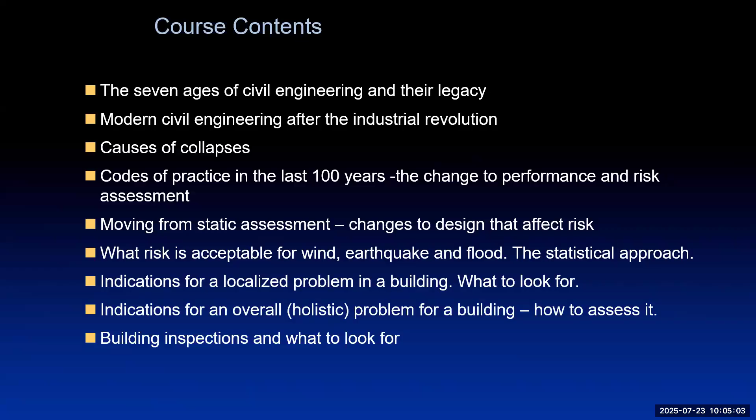And particularly, we'll look at the statistical approach, indications for a localized problem in a building and what to look for, and then indications for an overall, holistic assessment of an entire building and how to perform that. And then generally about building inspections, what we should look for.

So first of all, let's start with these 7 ages of civil engineering and their legacy. And these are the basic ones. I'm going to go into a little bit of detail here.

Essentially, we start off with early civilizations between 10,000 and 500 BCE. And that essentially occurred looking at palaces, burial tombs, ziggurats, pyramids, great walls of China, to keep out enemies of particular civilizations.

Then we have classical antiquity, between 500 BCE and 500 CE. That's basically the Greek and Roman civilizations. They introduced codification of sorts, and were particularly interested in producing roads to transport people, food, and various other things around. But particularly, they were interested in the water supply. The Romans developed concrete in their early stages, and the Chinese produced roof tiles during that period.

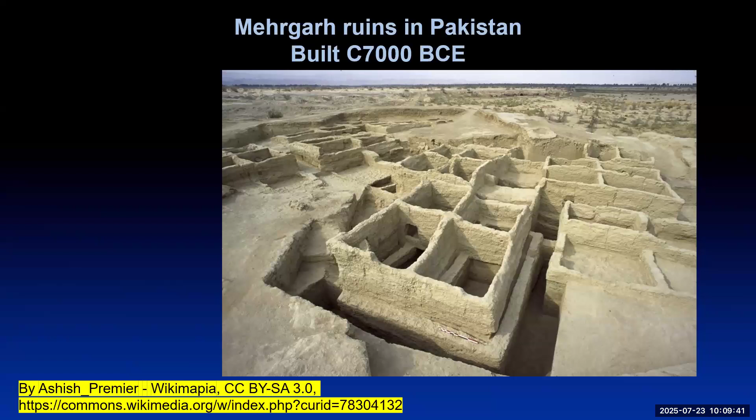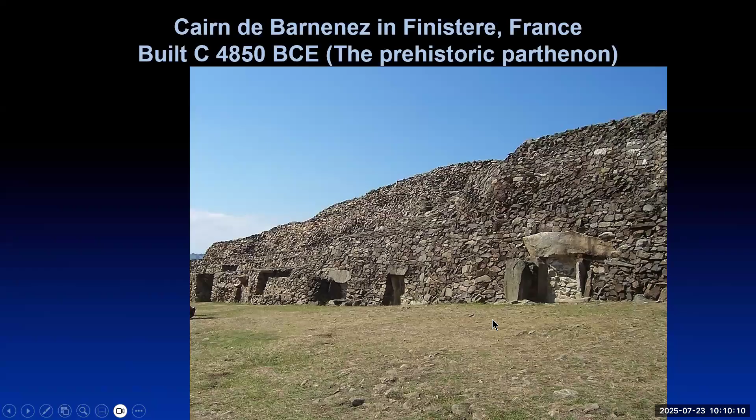Then we have Cairn de Barnenez in Finistère in France, which was about 4850 BCE, known as the prehistoric Parthenon. I'd like you to notice here that the materials used were stones, and these were fitted together. It was a type of building that we went on to use for over 1,000 years.

And then 3250 BCE, there is a temple in Malta. During all of this period, we found that the people who were in charge, the ones who manipulated civilizations, wanted cathedrals, temples, various things, and forts to be able to protect themselves. And this was in Malta.

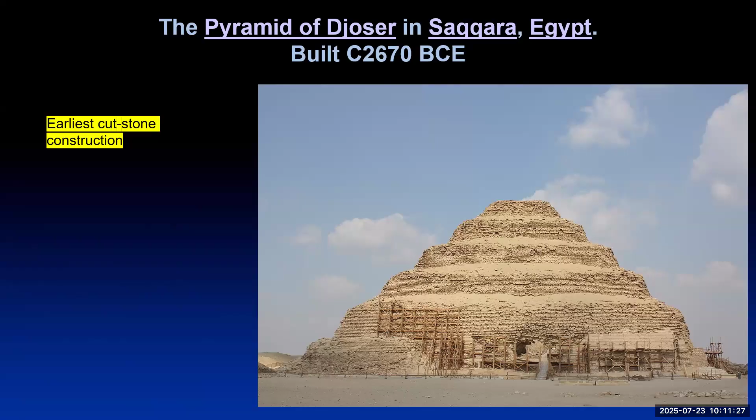And then you're probably aware of what was going on in Egypt. This is 2670 BCE, and it's actually the first of the pyramids that they constructed there. It's the Pyramid of Djoser in Saqqara in Egypt, and of course the Great Pyramid of Giza, which you're probably more aware of, and that was built 2560 BCE.

In Syria, we had remains of the Zimri Lim Palace there. Again, you could only build something extensive if you were a person of great power. And you can see here, this is basically mud, which is held together and cracks quite easily as well.

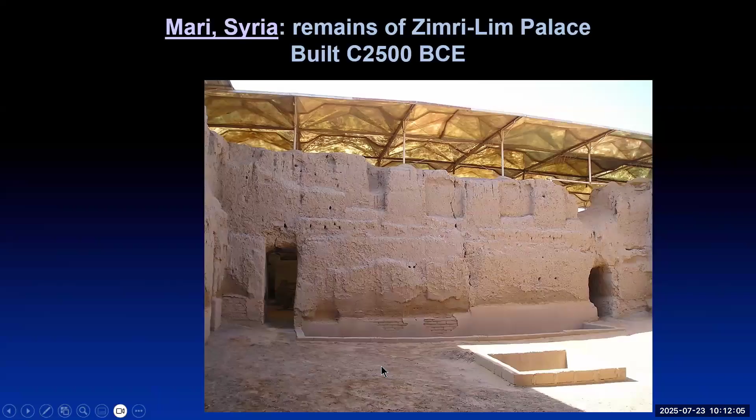And then we move into 700 BCE, in which there are properties which are called necropolises. This is burial chambers for important people.

And then classical antiquity, 500 BC to 500 CE. And there, of course, we have the Parthenon in Greece. Now, this was a much more extensive structure. It looks as though it underwent a lot of problems here, but it didn't. Ammunition was held in there for a long time and exploded, causing the problems, and it has never been put right.

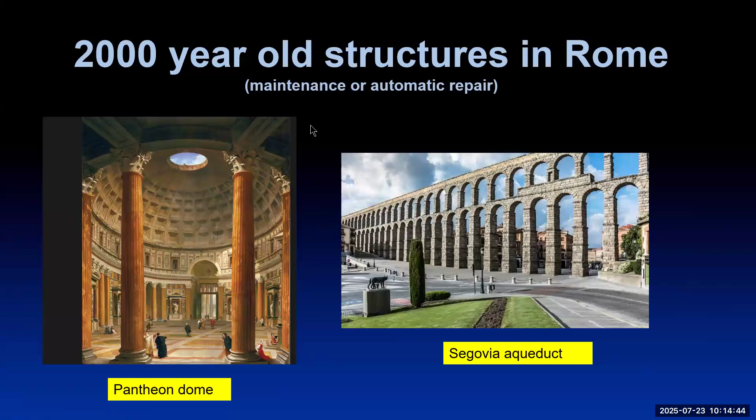There you can see the Pantheon, the dome, and the Segovia aqueduct. Now, they were very, very clever in getting water to come into their industrial areas. And this Segovia aqueduct was used for over 1,000 years afterwards. This is the Pantheon, and you can see the dome in the background there, and that's a view from outside.

And this is the Segovia aqueduct. You can see the use of arches, but very little cement in there. You can see, if you look closely here, that the stones were applied very carefully so that gravity would hold them together. And the use of the arch principle was extensive in Roman times.

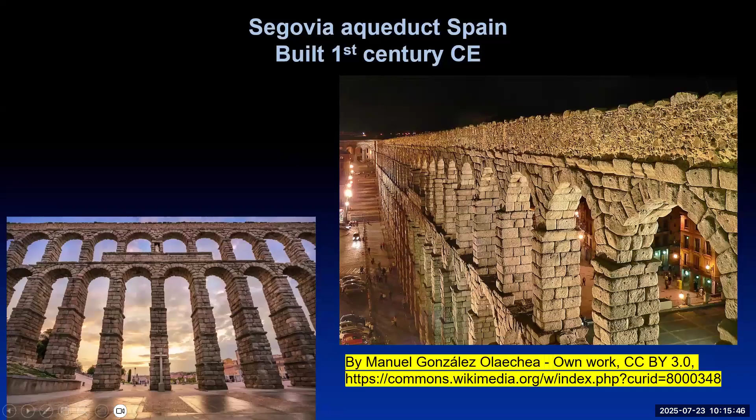They were also very good throughout the Middle East and Southern Europe in looking at the use of water for people bathing, cooling, and various things. Now, at this time, the Qanats underneath the Persian desert were built in 700 BCE. Remember, at that sort of time, there was no electricity, there were no power tools. These were hand carved and were built with such precision that the water would flow usefully, and people could go there to bathe.

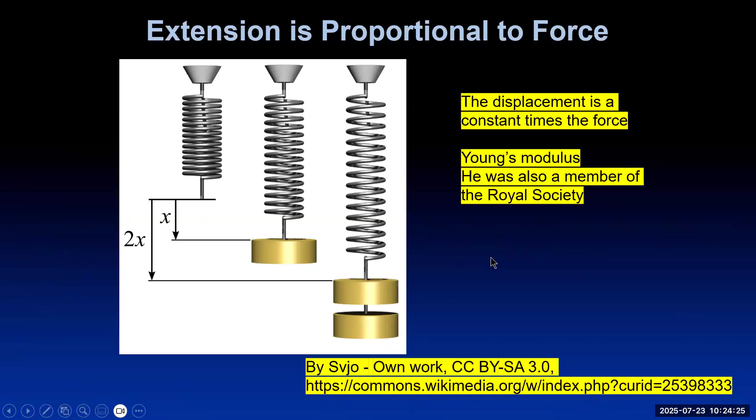In other words, if we have a spring with a weight on it, it extends by a certain amount. If we have 2 times that weight, we have 2 times the extension. Young's modulus will tell us what that can be. Newton's second law of motion, force equals mass times acceleration, we also use to some extent. So let's look for a moment at commonly used equations in civil engineering.

Firstly, the ratio of stress to strain. Sigma is stress and epsilon is strain, so E equals sigma upon epsilon. That is E, the Young's modulus.

For a bar with a constant cross section and deformation, then the deformation is F, the force, times L, the length, upon A, the area, and E, Young's modulus.

Deflection of the beam, simply supported, with a central point load: delta, the deflection, is P, the force, times L cubed, the length of the beam, upon 48 E, the Young's modulus, and I, the moment of inertia.

Critical buckling load, PCR, of a column of length L with moment of inertia I, is PCR equals pi squared EI upon L squared. Again, we have Young's modulus there. So Hooke and Young absolutely revolutionized what we are doing these days.

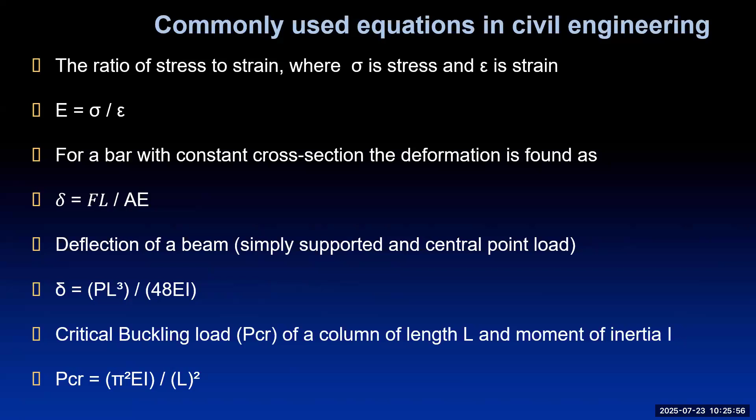If you've been to university or college, you will undoubtedly have undertaken some of these laboratory tests in which a load is applied to a beam and we measure displacement in some way. We use devices for creating larger forces, applying Hooke's law, which says that the displacement is the force divided by the stiffness.

Everyone does this type of testing when they're at school.

Now let's leave that for a moment and come back to it, taking you into the Industrial Revolution from 1760 to 1900. This was also a time of the Enlightenment, where science actually got a dominant position as far as engineering and civil engineering occurred.

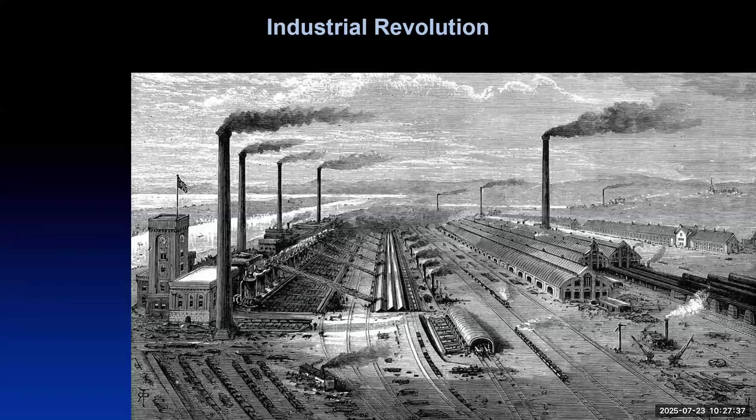The Industrial Revolution was based on the use of coal and other fossil fuels. We weren't so worried about the environment in those days. What we were interested in was creating heat, thereby steam, and being able to manipulate all sorts of things. We were also able to create iron because we had blast furnaces in which we made it.

This is a picture of the Iron Bridge in Shropshire, United Kingdom. It was built from 1777 to 1779, and it was the first use of iron to create part of a bridge, a part of a roadway going via a bridge over a river.

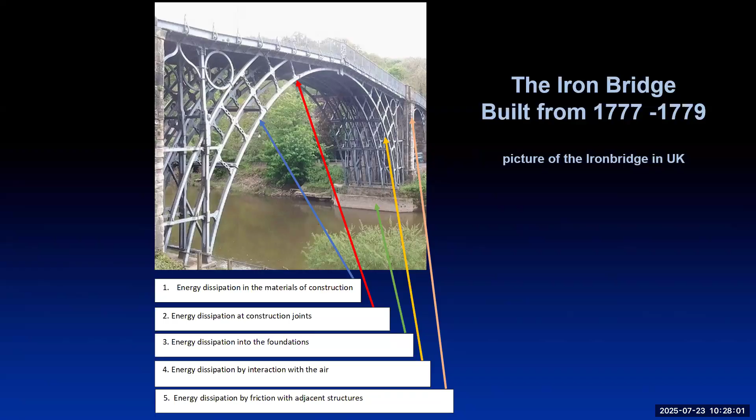If you look in New York City and other places in the United States around that 18th century, you'll see that the use of brickwork was very haphazard, but there was a rudimentary cement type. So if you have a building which is that old, be aware that the cement is going to be less stable.

Then we come to the early modern period, 1900 to 1999, where we looked at the dynamics of structures. We had unusual structures as well, because science was extending and allowed us to do all sorts of things we hadn't been able to do before.

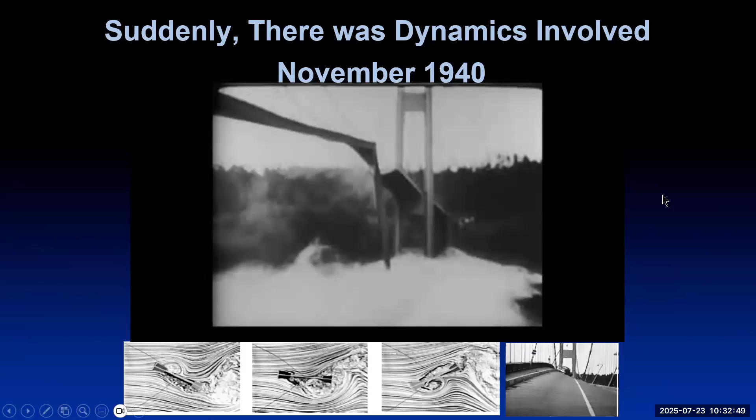Have we learned from it? No, we haven't. This is the RFK Bridge in New York City, where, in this particular case, we are monitoring damping. I'll come back to that later, but damping would normally be at this level and then rise as the amplitude of response increases. But what we've got is two areas here where we have excitation that forces the structure into larger amplitudes of response. In other words, it's vortex excitation in exactly the same way as the problem with the Tacoma Narrows. However, in this case, the wind speed which causes that resonance is so high that it's not a problem for the RFK Bridge.

That's because the RFK Bridge has a fundamental natural frequency of approximately 0.2 hertz, in other words, one cycle every 5 seconds. So the critical wind speed is too high for it to be a problem.

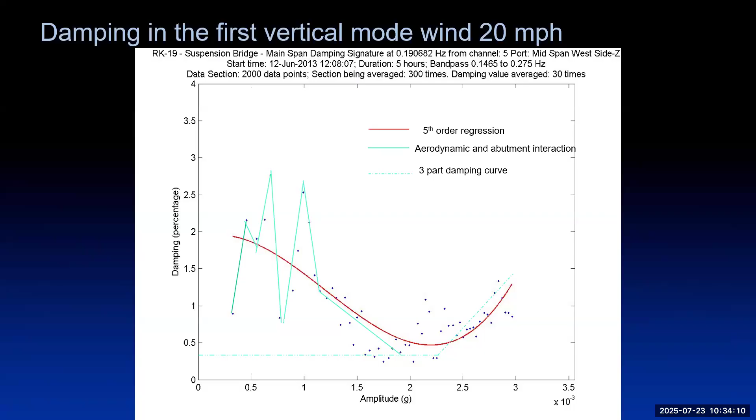I spent some time on site at Ferrybridge, and met somebody who'd actually been involved with the construction there. I made a comment to him saying they should have been 10 inches thick, they shouldn't have blown down. And he said, they weren't 10 inches thick. I built them. They were 8 inches thick as a maximum.

So the stiffness of the cooling tower was not enough to negate the effect of the wind. However, we didn't at that time, in 1965, understand what the dynamics of the response of cooling towers is, and they are very, very complex. We have problems of scour,

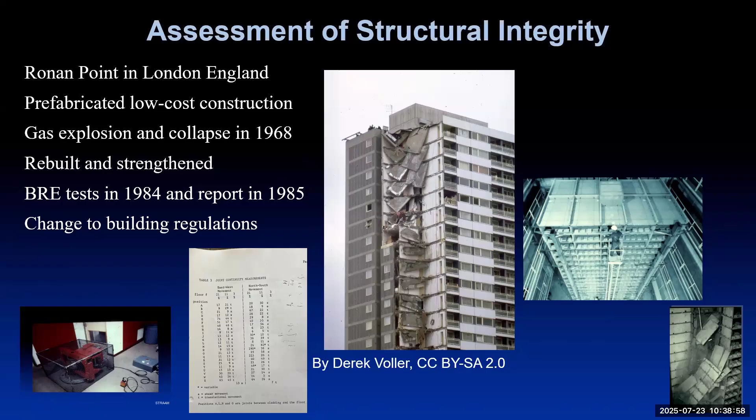There were other things going on, like the Teton Dam failure in the US. But what was happening was we were actually deciding that structural integrity is a must of structures. With Ronan Point, we decided that we had to define how we were going to affect construction. And that's come into codes of practice, including the United States ones as well.

So the codes allow for testing of structures, but currently engineers cannot verify structural integrity as required without measurement.

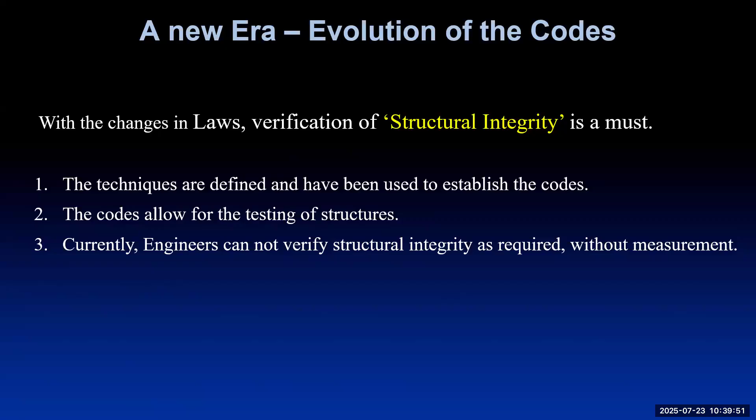So I'd like to step back again to say, okay, let's look at the process of design of structures. What actually do we have to do to do that? What do we give to an architect, a builder, to decide exactly what's going to be necessary to construct the building? First of all, we obtain a record of large forces and their magnitudes which occurred.

Secondly, we analyze these for the average return period for different intensity events. So you'll see the two diagrams below - on the left earthquakes and on the right winds. On the left we have the intensity of earthquake that gives a 1% chance of collapse of a structure in a 50-year period. On the right we have wind, 3-second gusts that will occur on average at least once in a 50-year interval.

Now those lines are of equal wind speed - they are called isotachs. On the left, the earthquakes, they are equal intensity of earthquake, and they are isopleths. Now all it means is that along that line, the maximum speed you're going to get for a wind, or maximum intensity for an earthquake, is going to be the same. Not actually the same, but the probability of them occurring is the same.

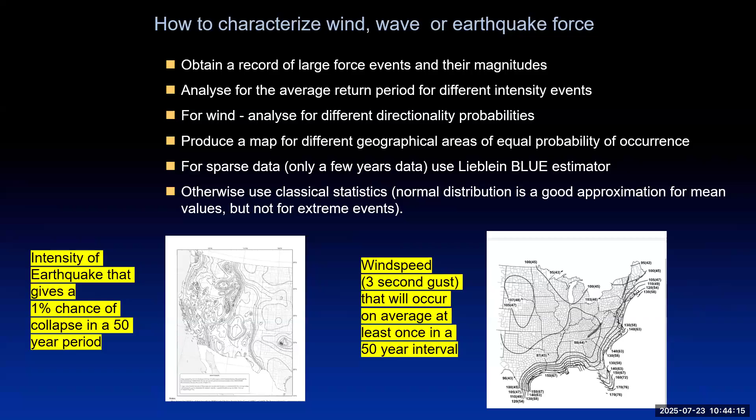So in the case of wind, we take the average or the normal value, and then we look at how that equates to the extreme that will occur. The extremes and classical normal statistics will tell you what the mean value of wind will be, and we'll look at that in a little bit more detail later. So the problem is that the ratio of the extreme to the mean is not always constant.

P is the probability, S is the return period, and n is the number of years. So if we take a 50-year period, then 1 upon S is 1 upon 50, that's 0.02, giving 0.98 raised to the power of N, the number of years. So if you raise it to 50 years, you'll find that the probability of occurrence of 50-year wind speed in a 50-year period is only 63.58%. That's what statistics will do for you.

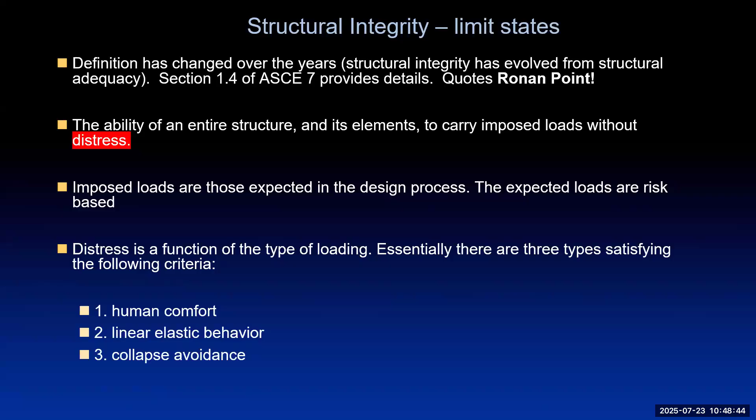So basically, inside wind engineering, we look at linear elastic behavior, and we don't want the structure to go outside that elastic behavior area, at least not often anyway. Earthquake, we want to avoid collapse, and that means that we will be outside the linear elastic behavior, and the structure will undergo some sort of cracking, and ductility will be used. So long as it doesn't collapse, that's what the design will look at.

Let's come on to the modern era, because now we have high tech, we have the electronic revolution, we have drones, automated design, 3D printing, advanced materials, and of course, a lot of mathematics that help us as well.

So let's just take a step back for a moment with the electronic revolution. The vacuum tube was invented by Fleming in 1904, and this allowed electrons to move in a deterministic way. They were difficult to use.

The transistor was invented in 1947. Transistor meant transfer resistance. Essentially, a transistor allows a variable resistance. So if the resistance is very high, no current will flow through. If it's very low, all the current flows through. There we have it, a 0 and a 1, which is why we have digital technology.

If we put a lot of transistors together, we have integrated circuits. They were invented originally in 1958, and that allowed the miniaturization of transistors, enabling electronic systems such as large-scale computers, supercomputers, quantum computers, electronic measurement, artificial intelligence, and organic electronics. The electronic revolution is going through a new stage these days, increasing rapidly, especially with artificial intelligence.

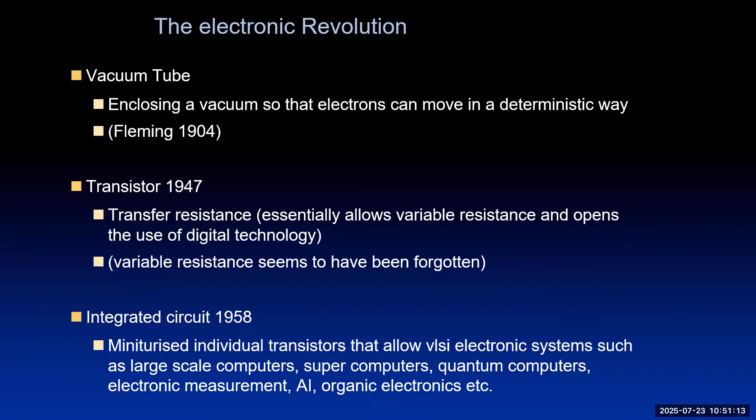Let's look at things vibrating. Everything vibrates. The absence of motion is almost impossible; theoretically it can only happen at an absolute zero of temperature. So everything is in motion all the time. Some things vibrate a lot. We design structures to withstand forces of excitation, such as wind, flood, earthquake, and others.

But consider that every cell in a human's body also vibrates, and so do parts of the body. The stomach, for instance, vibrates, which is why you shouldn't follow your children onto devices that create large vibrations, because your stomach is a different size to theirs, and you will suffer more than they do.

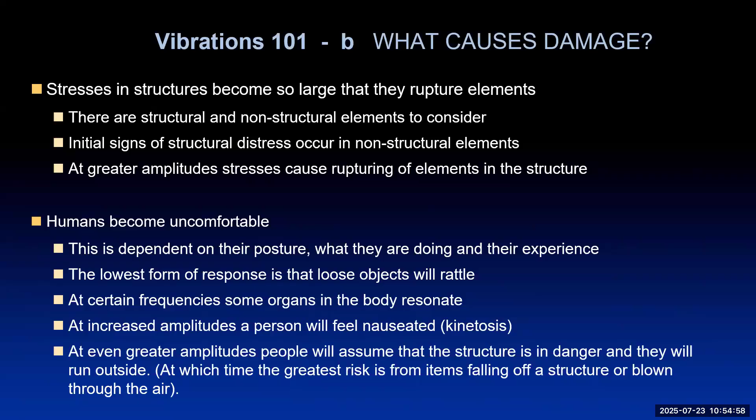It's comfortable for us. At increased amplitudes, a person feels nauseated—that's called kinetosis—because your stomach is vibrating and you don't want its contents anymore. At even greater amplitude, people assume the structure is in danger and will run outside, at which time the greatest risk is from items falling off a structure or blown through the air.

Moving on, vibrations themselves travel through solids and through amorphous bodies like air and water. Vibrations travel at different speeds through different types of body. If the vibrations travel through air, they're perceived as sounds.

If we do a spectrum analysis, we use a totally different estimate of a human's perception of sound compared to a structure's perception of vibration. As a result, sound intensity is measured on the decibel scale—small d, big B. The big B is because the unit is the bel, and deci means 1/10. So dB measures sound intensity.

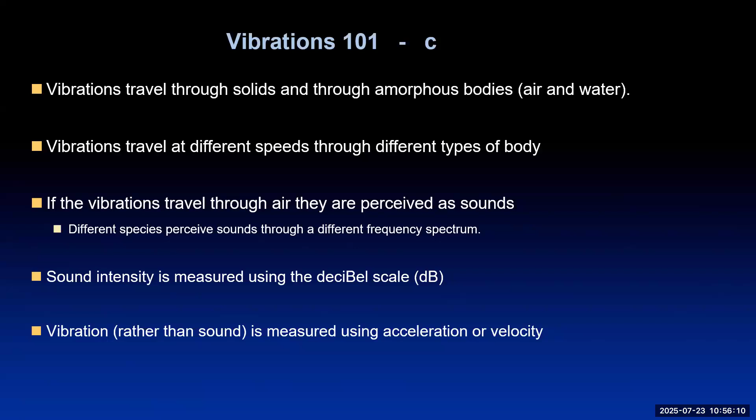Vibration, on the other hand, rather than sound, is measured using acceleration or velocity. So what about human sensitivity? We have a number of different levels of excitation by vibration that will cause a different response in humans.

Number one: vibration is just perceptible by humans, at 0.007 inches per second. If we assume that's times one, let's see what the rest is. Second level: people become uncomfortable, at 10 times larger, 0.07 inches per second.

Third: people get highly distressed, at 0.67 inches per second, approximately 100 times—in other words, 100 times the perception level will take you to the point of thinking, I do not want to be here. However, you go up to 700-745 times before light cracking in non-structural elements occurs, and damage to non-structural elements occurs at 10 inches per second, 1490 times.

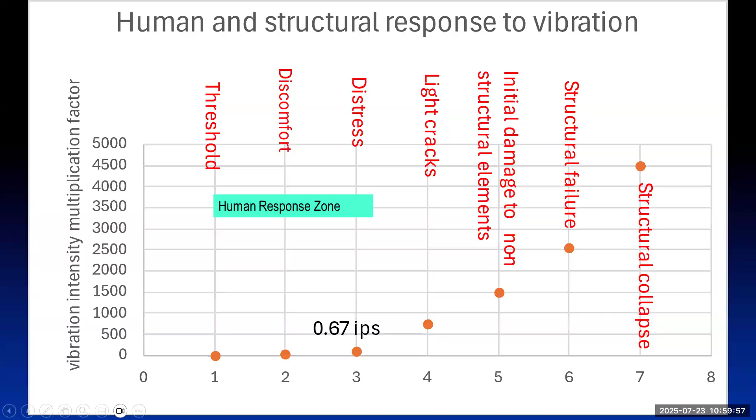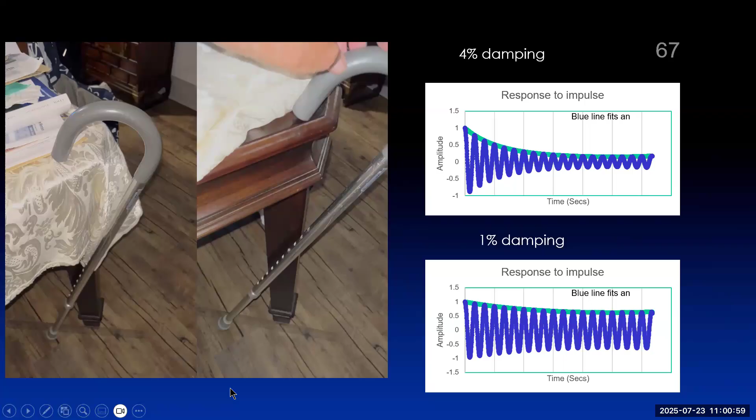On the right-hand side here, we have a structure which has very little damping. And on the left-hand side here, we have the same structure, but now it has damping - in other words, energy is dissipated into the tablecloth on that table. So if I set it going, that's the low damping, and there is the high damping. You can see that high damping will stop the structure from vibrating much quicker than a low damping ratio. So damping is very important.

It allows you to define what the maximum response of a building is going to be. You might say, well, we actually want higher damping then. But no, we don't, because higher damping is caused by energy dissipation, and the main reason that energy gets dissipated is through cracks in the building. And when there is differential movement going on, the crack is elongated as well. So, yes and no - a larger amount of damping is an indication that there may well be damage inside the structure. We'll come back to that.

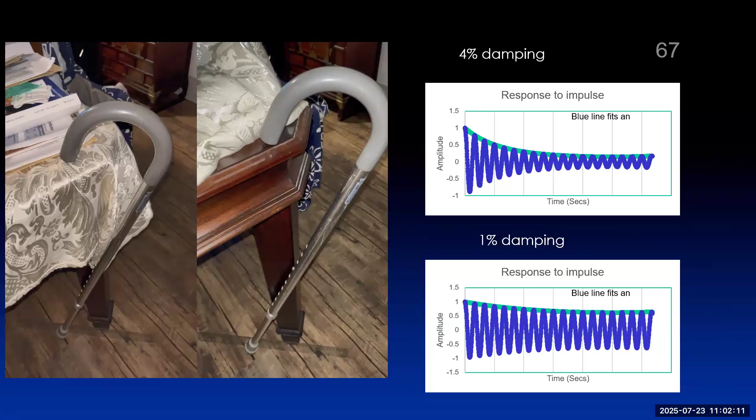And then, of course, we had something which set us into panic: the Champlain Tower in Florida. Part of the building collapsed, and we had a lot of discussion of what caused it. NIST still hasn't produced their report about it.

And during this time, there were various things that were occurring. There was deferred maintenance, funds not used to address damage, repairs which they knew they needed. In 2018, that was estimated as $6 million. In 2020, it was estimated as $15 million. And then June the 24th in 2021, the structure collapsed and the repairs had not yet been started. The property manager knew of the weaknesses.

However, Florida decided this must not happen, so Florida changed the law. A number of states in the US followed suit. What they did was say you must assess a building for structural integrity, and you must also have a reserve, so that once the structural integrity result comes in, you have a rationale for what you're going to do for maintenance on the structure, and the money set aside must be adequate for doing that. Unfortunately, that's running into trouble, and a lot of people are simply leaving buildings like this and going off to live somewhere else, which leaves the owners of the building with a big problem.

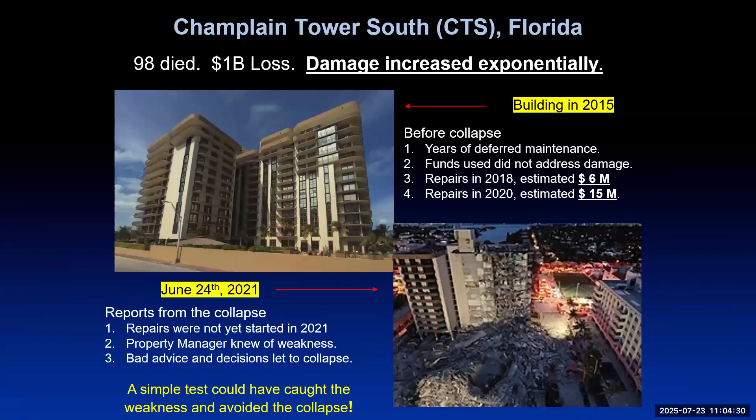We also had something in Davenport, Iowa, a 100-year-old building, where a large amount of the external wall was demolished. 3 people died in that, and more - 70 families were left homeless. The structure had documented deterioration, but nothing was done about it. And in fact, in 2020, there was a Derecho, which is a wind form in which a long line of vortices occur, and basically the speed was 126 miles per hour.

Florida passed Senate Law 154. And I want to read you something that is in that law: the legislature finds that maintaining the structural integrity of a building throughout the life of the building, its service life, is of paramount importance in order to ensure that buildings are structurally sound.

So what do we have to do? An inspection has to be performed under the direction of an architect or engineer licensed in the state of Florida for the purpose of attesting to life safety, the adequacy of the structural components of the building, the general structural condition of the building as it affects safety, including repair and replacement. They also have a statement that it is 'to the extent reasonably possible.' You can bet there's going to be a lot of lawyers arguing about that.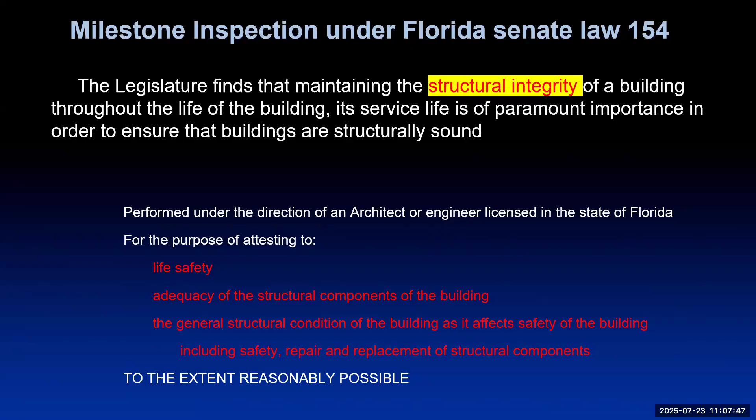So now we come back to this: we have the design assumes a force, and we will have the response of a building which is okay as far as human occupants are concerned, and the structure itself. Again we have these three levels: human comfort, the structure not being particularly badly affected, and thirdly, it doesn't collapse.

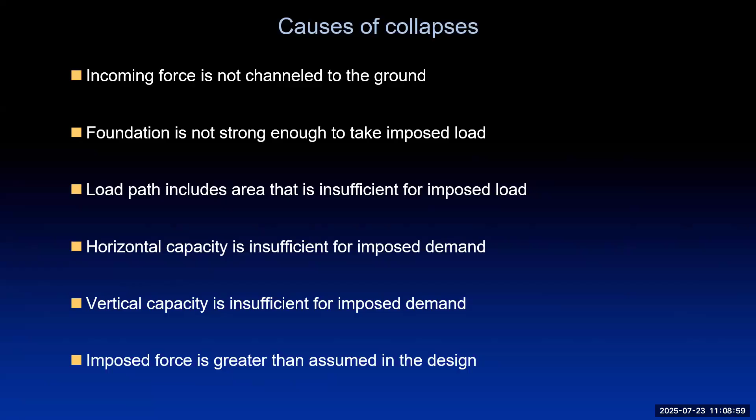So the modes of failure - this is an interesting one. A mode of failure must develop if the structure is no longer capable of performing as intended. In other words, human beings must be comfortable in the structure. Human response is the most complex type of failure as well. Physically, elements can no longer take the intended loads and parts of the structure begin to act independently - if the cracks are large enough that they make little parts of the structure independent from other parts, then you've got a failure, which is important.

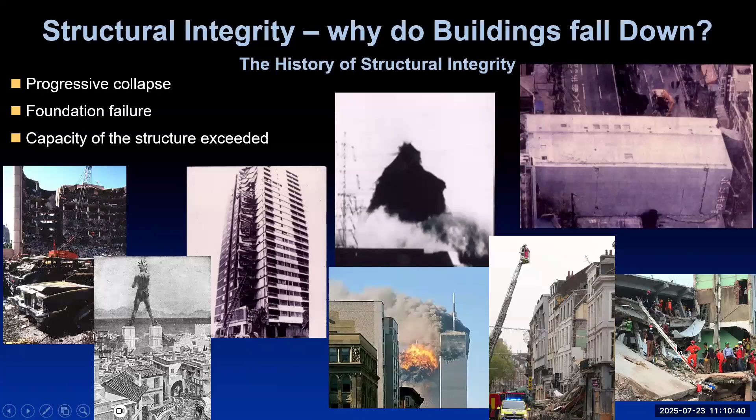There's a list of them which you can see, but I do want to point out that there are a number of items which occurred throughout history, and we need to be aware of them. First, the Tay Bridge in Dundee, Scotland - that collapse allowed a train to be deposited in the water. So we changed regulations. At that time we were assessing wind loading force as 10 pounds per square foot. So we increased it from 10 up to 15, and later up to 30.

Ronan Point in 1968, a gas explosion, 4 deaths, but we knew then about disproportionate response, a progressive collapse. So we changed the building regulations to avoid that again. I've told you what happened with that - it was inconvenient for the government, so they wouldn't allow people to have a look at it.

Then there was a building in Bangladesh. In this case there were 1,300 people who were killed. The Spectrum factory collapsed, and 8 years previously they had heard cracking in the building. They'd changed regulations, but nothing was done about this. In fact, on the day it happened, people heard large amounts of cracking occurring in the structure.

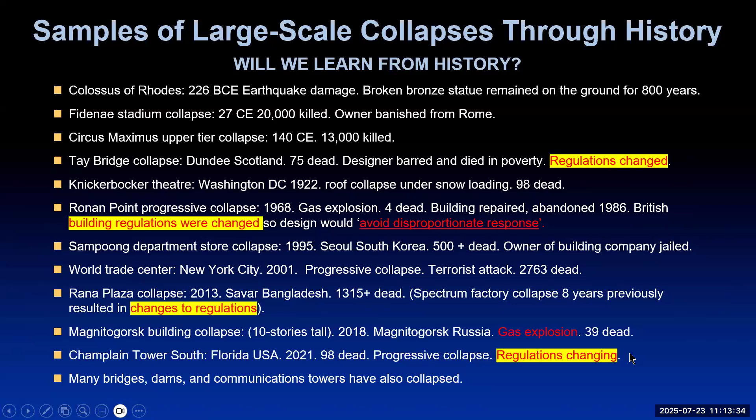And then, of course, the Champlain Tower. So we know what to do - we'll change the regulations? No, we need to do more than that. We need to do a lot more than that. Part of what I'm trying to tell you is how to do a lot more.

During the last 100 years, we've changed our codes of practice. We moved from this idea of a quasi-static force that we designed for, and then moved to performance of the structure and a risk assessment. Of course, we still have design errors, but this is what we did with the codes of practice.

In 1879, there was the Tay Bridge disaster. We had the Tacoma Narrows Bridge failure. In the 1950s, we were still using prescriptive design - in other words, we would say what size columns need to be, how thick floors need to be, how far apart we would put columns. And we took a long time to realize that isn't really what we want.

In 1989, we're moving towards goals. In other words, never mind saying you must build with certain size columns - you must actually achieve some sort of goal. So we started doing that in 1989, and that effectively was the introduction of the 50-year wind, for instance, in most parts of the world - not in the United States.

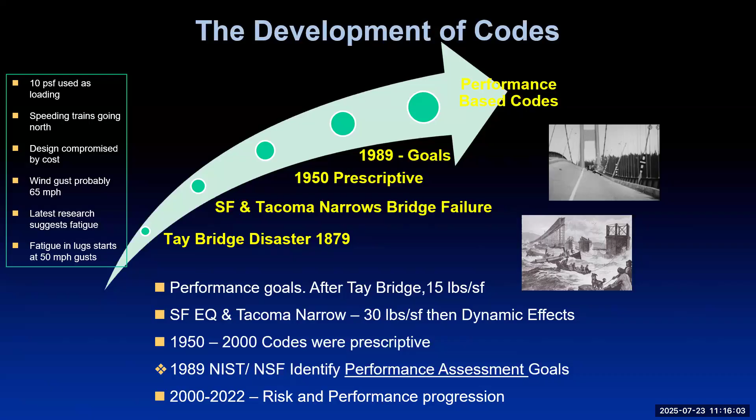And we still have, in 2022, risk and performance, which we're talking about. That was the Tay Bridge disaster, and that was what it looked like after the collapse in 1879.

ASCE and SEI were producing - they had a task committee for performance-based design, and this is part of their mission statement: although nearly all modern design specifications are targeted to achieve some level of performance, most structural design today is not performance-based. Rather, typical design procedures evaluate design acceptability through conformance to prescriptive criteria on materials, configuration, detailing, strength, and stiffness. That's a pretty damning statement. In other words, despite the fact that we're still looking for acceptable performance, in practice we're still looking at criteria based on materials, configuration of a structure, detailing, strength, stiffness.

Such criteria are deemed to result in structures capable of achieving acceptable performance without clearly defining the performance expectations. In other words, we need to measure the performance to be sure we've actually achieved what we set out to do. Furthermore, the engineer using such prescriptive procedures does not explicitly verify the ability of the structure to achieve the desired performance. Well, actually, we have a way in which we can do it now.

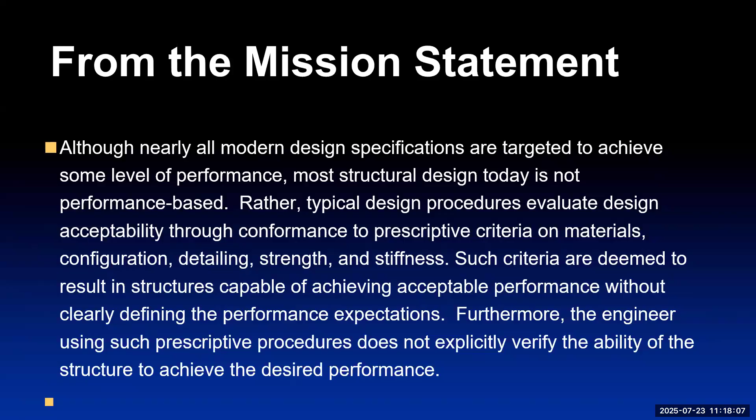So take a step back for a moment, moving from a static assessment to those that affect risk. What we actually have here is force equals mass times acceleration - there we go, Isaac Newton. And we have the force and the building criteria here in an equation which allows us to calculate a number of things: mass times acceleration, damping times velocity, stiffness times displacement.

And if we modify this, we can say that the displacement is the force which will occur on the structure, and then some sort of representation of the structure. This part is actually looked at in this diagram here. So at zero frequency, we've got statics, and up at the resonance, we've got dynamics, and we have a dynamic magnification factor, 1 upon 2 zeta. So zeta is that damping ratio I was telling you about before.

In our codes of practice, we say what the maximum force should be for the once in 50-year event. And we will have a displacement based on the stiffness elements in a structure, resonance frequency, and damping as well. In other words, we assume we know what the structure is going to do, we know what its stiffness is going to be. If we take statics, we don't need to know any of this about damping or frequency of resonance - that's what we do, and that's what we do with finite element programs as well. But why do we look to see what the displacement should be with a particular force? If we actually look at the displacement per unit force instead, that becomes rather useful to us.

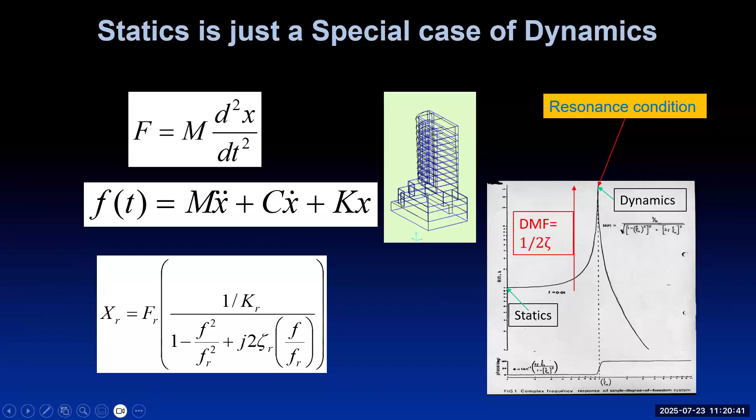So we did in the British government a lot of exercises of finding out what structures actually did. We shook this structure, this laboratory experiment, with this vibrator system.

We shook those 40 structures. So let's look at what the design is. We're saying we take a 2% chance per year. That's common, but you don't have to stick at 2%.

Calculate the design event associated with this risk. Assemble the data about the design event for the chosen risk, for example the 50-year wind. Then the designer needs to model their structure and test the model for the design event. In other words, the designer comes up with an architectural design, produces a model, mathematical, physical, or some other form of modeling.

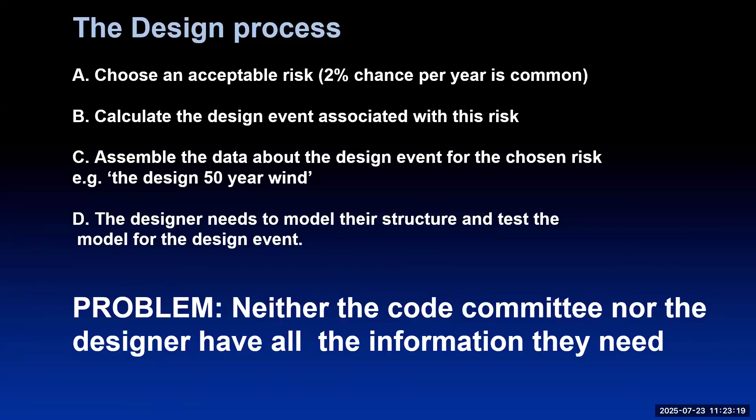Now, I'm speaking to you at the moment as a member of code committees in Japan, Australia, Brazil, and the United States. I'm actually currently on the ASCE committee looking at the assessment of existing structures right at the moment.

What is structural integrity? Whether the building has the required capacity. In other words, capacity and demand. Demand will be what is coming in, what the designer has said is necessary. Capacity is what the building actually has. So if you measure capacity upon demand, then you're well on the way to assessing the structure.

ASCE 11 and ASCE 7 address requirements for this, and Florida Building Code now has a requirement that if there is a 33% loss of horizontal capacity, then that is unacceptable.

So in other words, as somebody who is doing an inspection, you need to be able to assess how much loss there has been. Is that possible? Yes, it is possible. It is now.

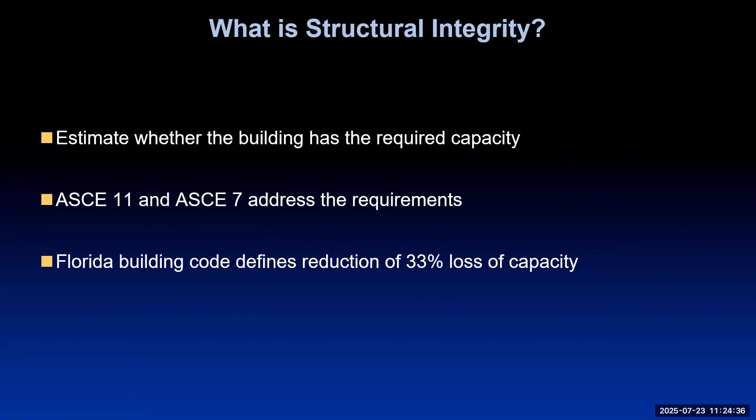ASCE 11-99 is now MOP 158, and this actually has been there for 26 years. It contains a lot of information written in a very unfamiliar sort of way. But that does allow you to do different types of in situ testing on a structure.

So, for instance, we can do acoustic emission, sounding techniques, ultrasonics, ground penetrating radar, thermography, fiber optics, imagery, AR, VR imaging. So that's setting up a model which is virtual reality.

Which you can then compare with what the structure is actually doing. You can then go to dynamic analysis, integrated sensors, X-rays, core samples, in situ strength mechanism measurement, corrosion detection, ingress and transport, carbonation.

And if you fix on dynamic analysis and in situ strength measurement, then you can measure the holistic behavior, the actual response per unit force that occurs on a structure.

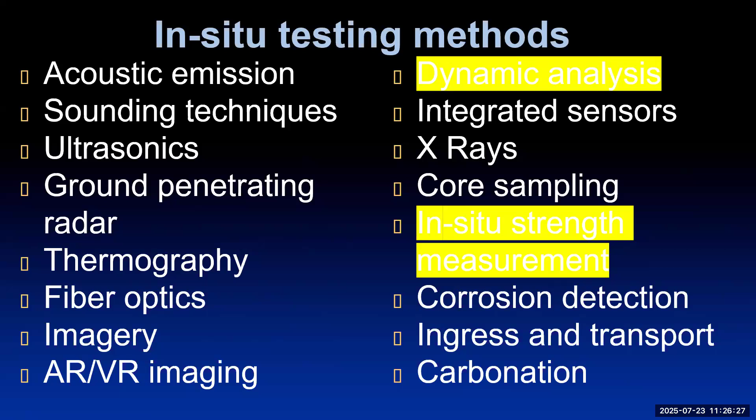So how do we create a force? First thing to know about is that we don't need to. As long as we're looking at displacement per unit force, that's all we need to know. And that's by courtesy of Newton, Hooke, and Young.

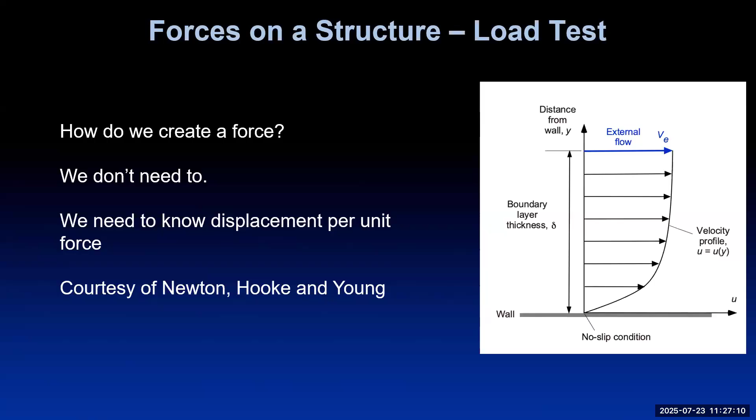So if the wind is blowing, then we have a boundary layer, we have friction with the ground, and the boundary layer extends up a certain height, and the wind gets stronger as you go further. In fact, this will extend up probably somewhere around about 500 meters, maybe as much as 1,000 meters, a kilometer.

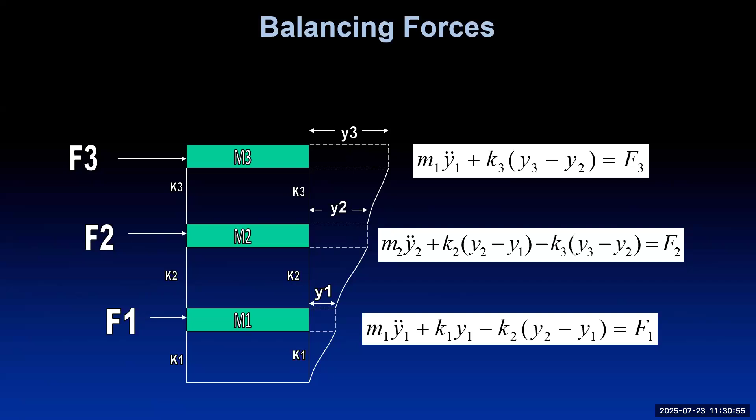We are able to make damping measurements under earthquake loading, but when there's a big loading, that tends to induce soil motion, ground motion as well. Whereas with wind, we generally don't have that occurring, but it's still the same structure. So if we use the wind, we can assess the structure. If we use an earthquake, or wait for an earthquake to occur, that's not so convenient.

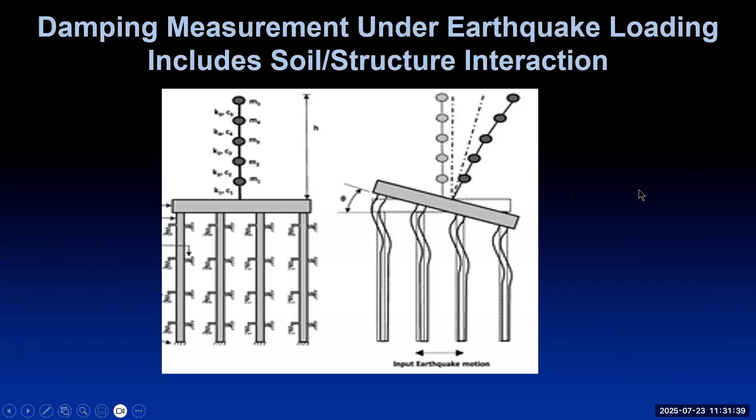We have aerodynamic instabilities - the Tacoma Narrows in 1940, and there is a bridge in Volgograd, 2010, where the same type of instability occurred in that bridge. So we don't learn from lessons.

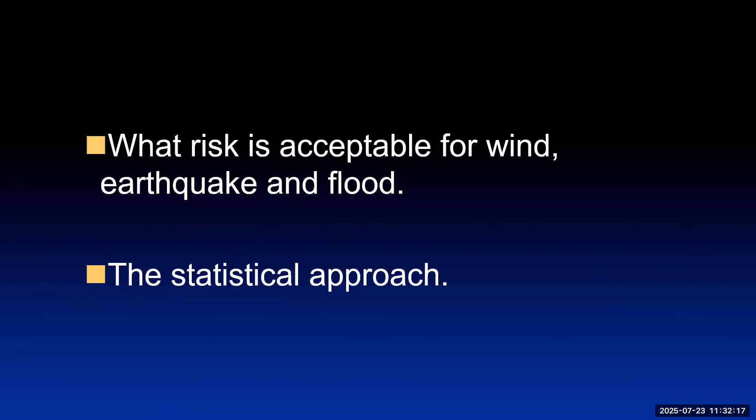So what risk is acceptable? We've said we'll accept a 2% per year probability of a wind or an earthquake, which is unacceptable to us, and we use the statistical approach.

So what's a force? We have the boundary layer with the wind. We have earthquake excitation coming through the ground, P waves and S waves in the material of the ground. We also have water forces occurring, so we've got floods, earthquakes, and wind as the main items of forcing. We also have fire, of course, but I'm going to leave that to one side at the moment.

How do we measure a force? We can use Newton's second law of motion, force equals mass times acceleration.

In practice, what we do is have a seismic mass with coils on either side, so that if the mass tries to move, those coils produce a signal which is sent into a feedback network and will then go to a little servo motor which drives that mass back to its neutral position. The force necessary to drive that is proportional to acceleration - good old Newton's on our side once again. So that's quite easy - that's called a servo accelerometer.

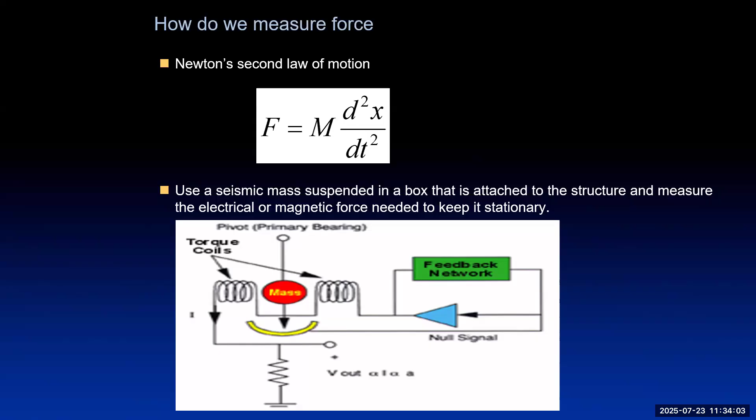Now, we were able, doing experiments like this, to take the force, the frequency, the amplitude measured by our accelerometers, and the damping ratio measured off this kind of decay. So if we put these all back into the equation and use it to calculate the mass of the structure, we find that even though frequency is changing, damping is changing, right the way through all these different amplitudes, we get a pretty constant value for the mass of the structure, which is a pretty good indication that we're okay in saying we're dealing with the linear elastic range.

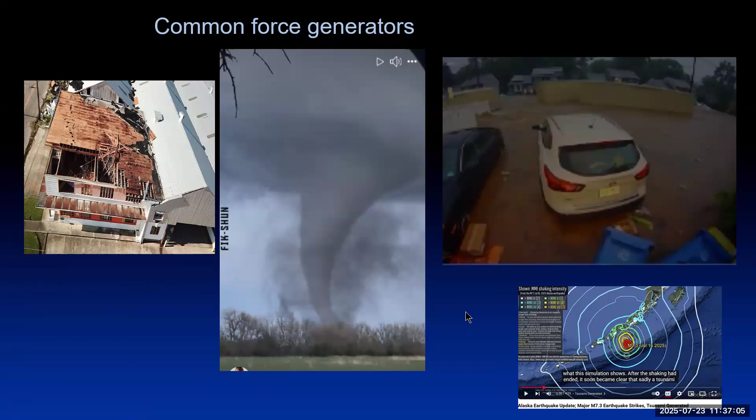This is the Alaska earthquake, which happened this last week, just off the Aleutian Islands. So we've got all types going there. And this is a response due to an earthquake, not the Alaskan one, but we took an excitation there with maximum acceleration 1.8 Gs. You can see the ambient excitation is small, then as the earthquake comes through, you see that little bit of aftershock as well.

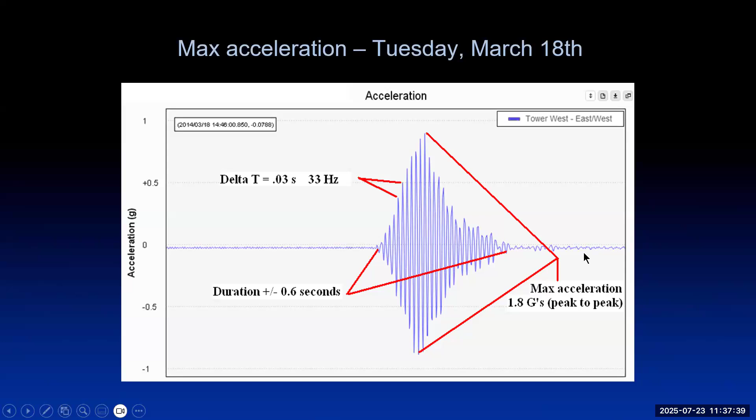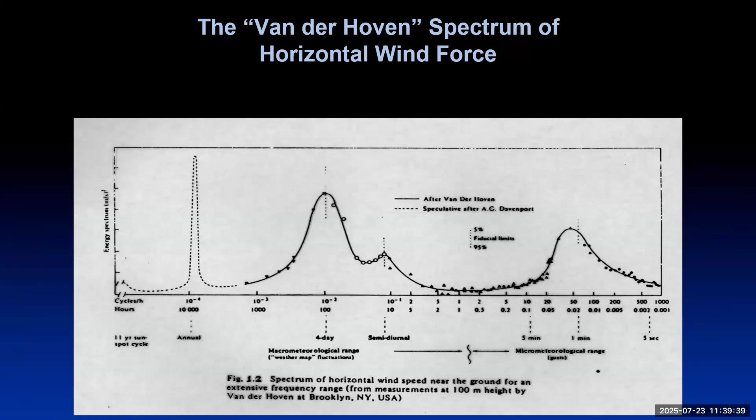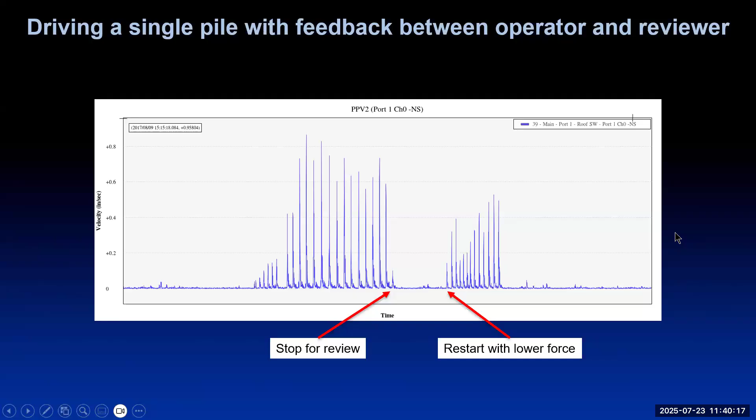So, indications for a localized problem in the building - what to look for. There are questions you should ask yourself: Is it in a load-bearing member? Is it confined to the surface? Do you need to test for the depth of the crack? Do you need to test the member which has a crack? Does it have implications for load carrying in a wider area, extending out into the whole structure itself? Does it indicate a holistic problem to the structure?

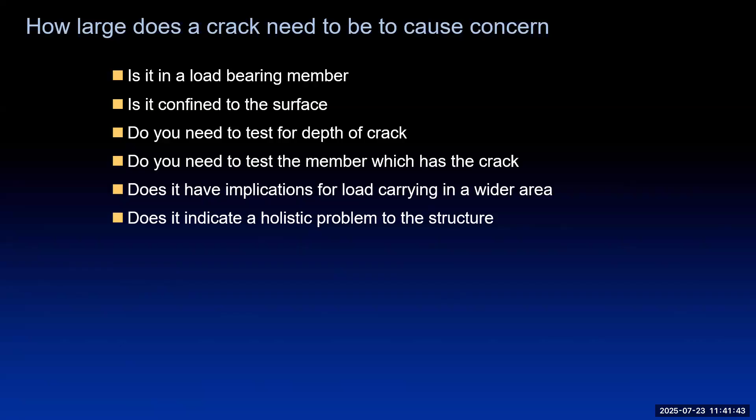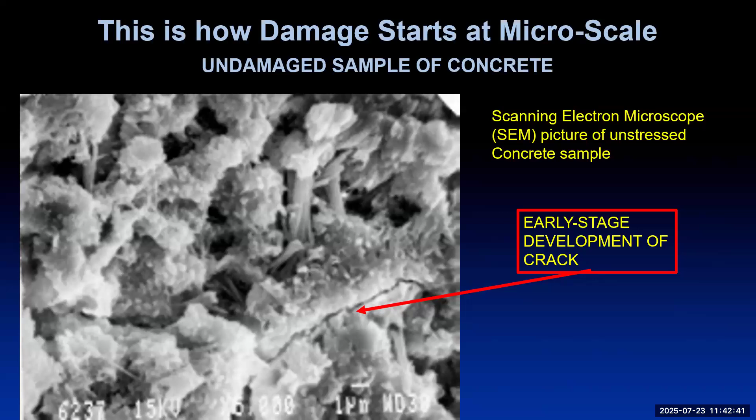How big does it have to get? Well, we have to look and see whether we've got a compromise to parts of the structure which are dictating load sharing throughout the structure.

We did an induced vibration test in which we shook a building and had people do a number of tests in there. It's the only one that has ever been done anywhere in the world. And those numbers, 90%, 10%, and 2%, actually equate fairly well with the laboratory tests as well.

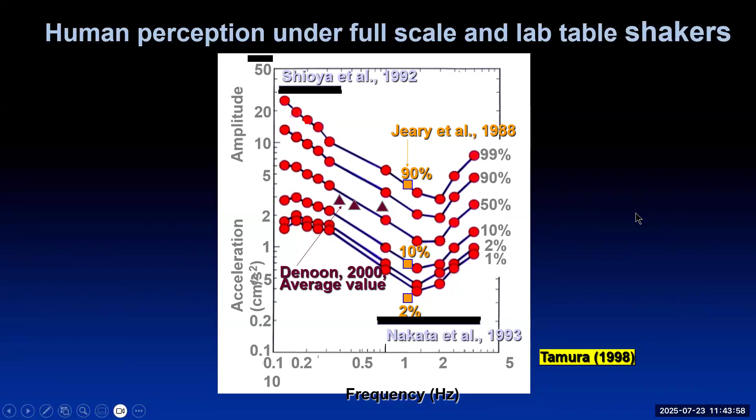So we've got an idea of what people will accept. If we have a measurement which looks at the response of the entire structure, the holistic structure, then we know there's no elastic zone. It's an approximation. Ductility changes the system properties. It does not change physics.

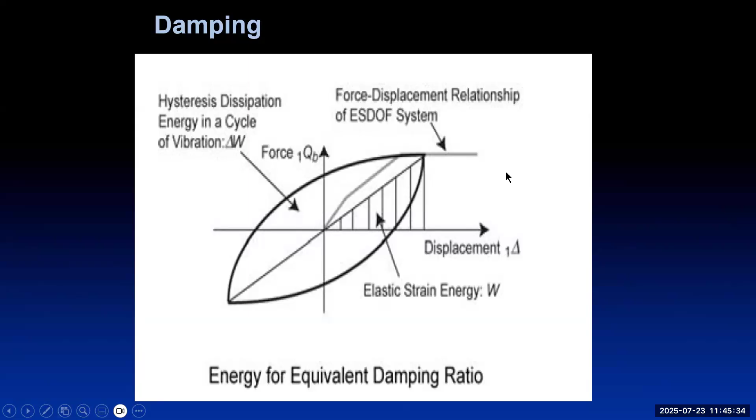In this particular case, there was a building in New York City, and there was a garage in front of this, and so the crack wasn't seen by people until the garage was taken away. We actually used 2 accelerometers, very expensive devices, $4,500 each, to measure what was happening in the crack. And that's probably the most expensive strain gauge that there's ever been in the world in that case. The crack itself was moving all the time.

It was moving vertically, it was moving horizontally, and it was twisting as well. So we took all that. Crack gauge is quite a bit cheaper.

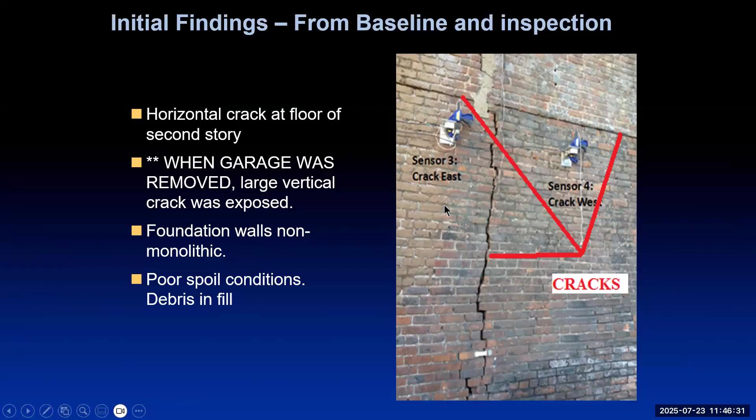In this particular case, also in Manhattan, we did a finite element model to take a look at what was happening, and we were actually able to tell them that no, there wasn't a problem, despite the fact that it looked really bad. We were able to say that the majority of stiffness at this end of the structure was actually supporting the rest of the structure, and there was not a problem. And now these days, they didn't do a stop work; they just went on with it completely, and the building didn't fall down, and we saved them an awful lot of money.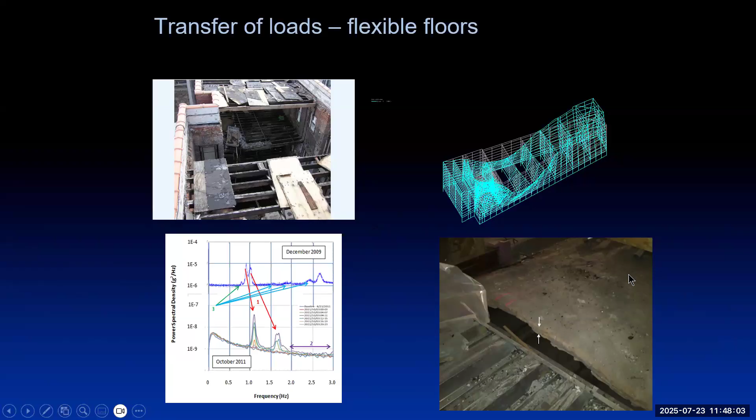Additionally, no, I'm going to skip over that.

So the approach for assessing a structure holistically is measure the performance at as early a time as possible. Secondly, compare the performance with that assumed in the design. After an event - wind, earthquake, subsidence, waves - measure the performance again and compare the new performance with the baseline value and compare to the code requirements.

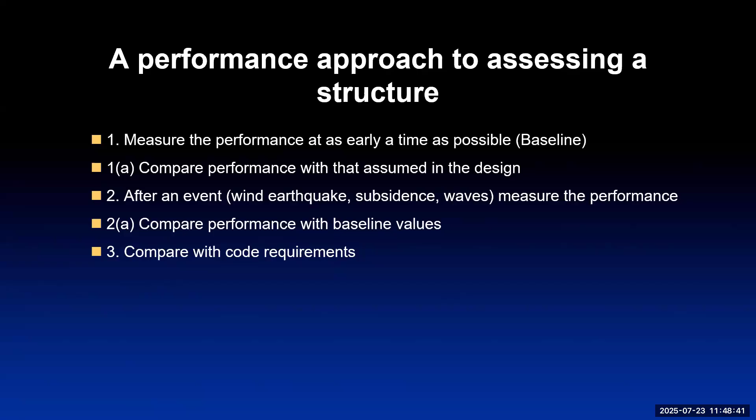The definitions of distress for humans: we have floors, bounce, the sway of buildings, and there's movement in bridges. If you sat in a vehicle on a bridge stationary, then you'll be aware of vibrations that can occur.

Indications of damage: efflorescence, rusting of reinforcing, spalling of concrete, displacements of foundations. On the right upper side there, you see a displacement of a foundation, which is a rather extreme case. Differential settlement, large cracks. Now, the large cracks not only need to be surface width, which is significant, but also the depth as well. And if they are in structural members, then they're of more importance. Pooling of water in supposedly flat surfaces.

Leaking windows. If windows leak, then it's very likely that the building is swaying around, and the glass cannot do the same sort of thing as concrete will do. Foundation problems, you might see differential displacement there. So if you do, that can be an indication of a problem.

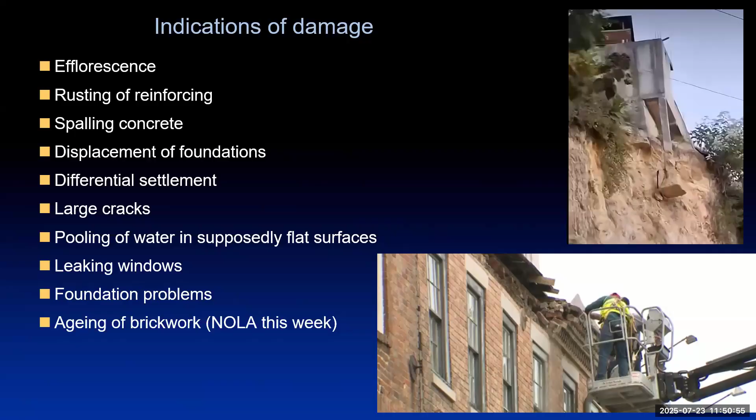How do we inspect? To look, we need to do research. The research needs to come from a reputable source—if it's generic, it needs to be peer reviewed. In other words, what force does the structure need to withstand? You need to take it from peer-reviewed journals, standards, or codes of practice. If it comes from the internet, you should be very skeptical about it.

You need to ask the right questions. Has this been updated? Does it tell you how the building is? Does it tell you about the repairs to the building that have occurred?

Site information needs to come from a complete record. If the owners or the building management don't have a complete record, then it can be a problem.

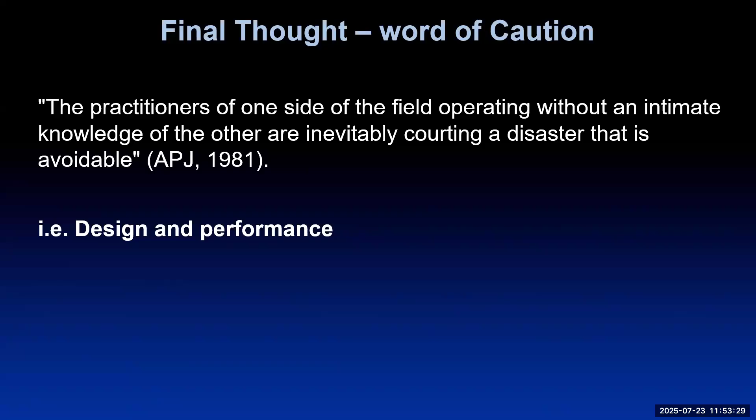That statement was actually in my PhD thesis back in 1981. It's available in the British Library. Now, I'm going to go through this quickly because we're running out of time.

But here are some towers in Florida, and those are the characteristics of the two structures. Here we have frequency and here we have damping. You can see the natural frequency of the north tower, east-west, is 0.425 hertz, and the south tower is 0.387 hertz.

Now look at them—what's the difference? The only difference is they were built at the same time by the same group to the same design. The only thing that's different is this plinth here to allow a swimming pool. The conclusion is there is energy dissipated by the northern structure into the plinth, whereas there isn't so much energy lost occurring in the southern tower.

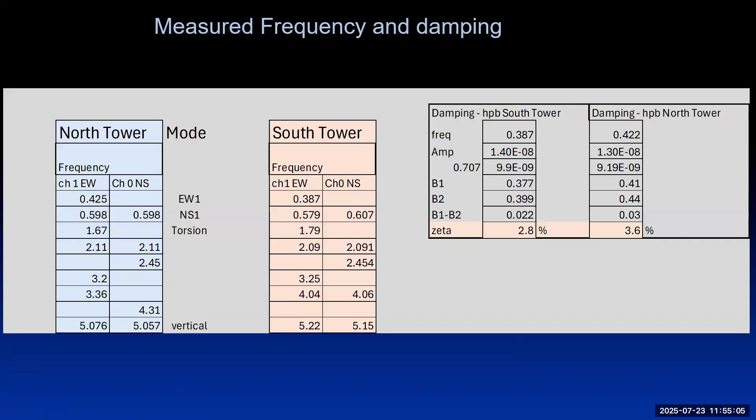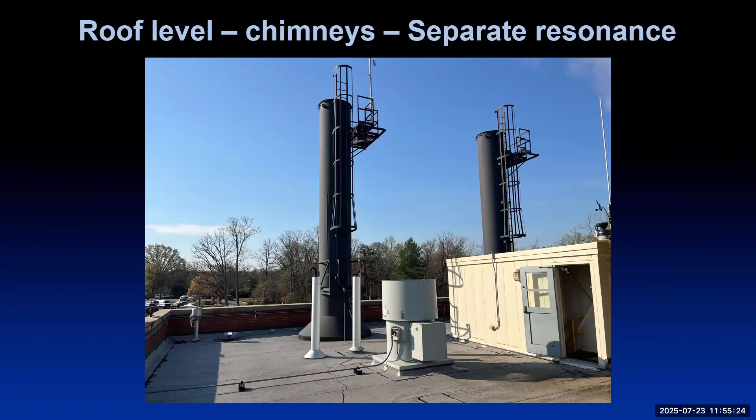So there are a number of other differences as well, although they tend to follow a similar sort of route. This is from a much shorter building, and that's a view on the roof. There are a number of attachments to the roof because they are a bigger mass compared to the mass of the building—they have more influence—and there's a spectrum of the east-west and north-south.

Now you see that in this particular case, the sensor placed here on a chimney is also picking up a lot of other structural responses of the chimney itself. The response is particular, but you have the same response in the two directions, so that must be a torsional response.

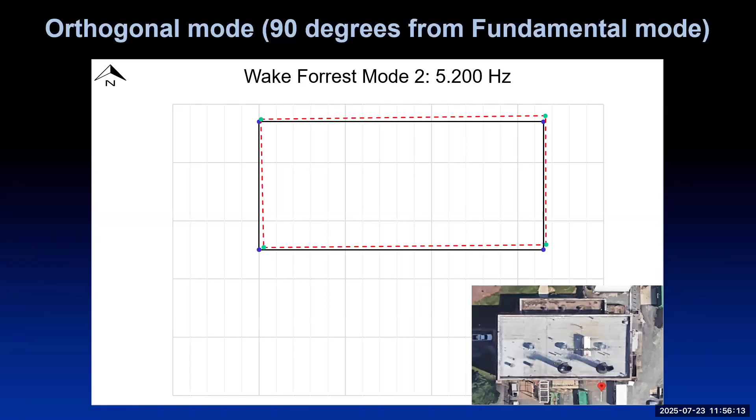And then we have the response—if we look down on the building, we see it moving, swaying in the north-south direction. Torsion there. The again another torsional mode in the east-west direction. But now look at this measurement in the four corners of the roof—there is much more motion occurring in this corner of the building.

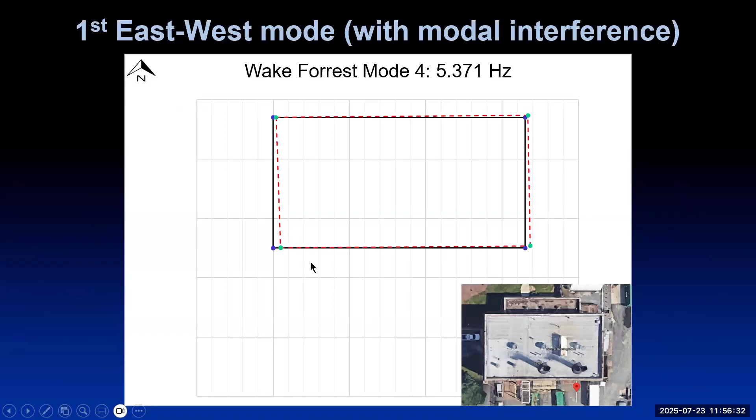So we look at the modal ratios, and we can use that for going back to the building at a later stage and seeing if anything has changed.

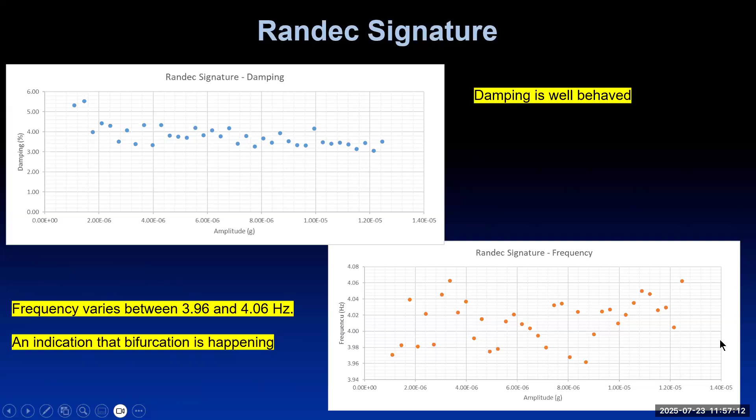And if we look at a Randec signature, then we find natural frequency and natural damping. So damping we've got somewhere around about 4%, and you would expect it to be similar to the frequency. Now we're seeing the frequency jumping about a lot though—that means energy is being shared between two separate modes of vibration. And when we take this risk ratio, we can look at what the design wind load will tell us we expect a frequency to be and what we expect a damping ratio to be. As a result, we can say the risk ratio in this particular case was 1.38.

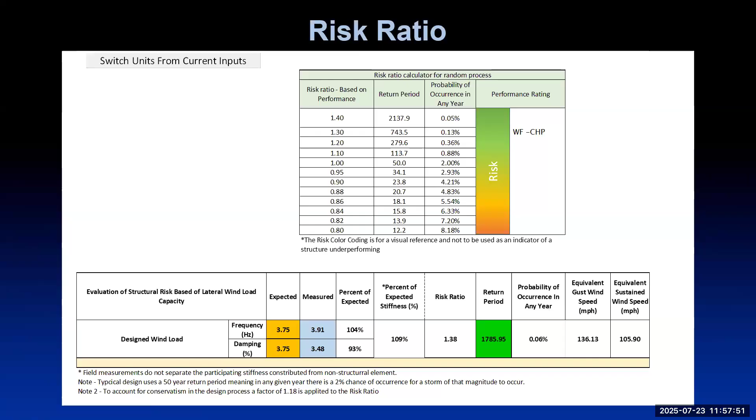So that is a return period of 1,785 years. It's a logarithmic scale, so you can't just multiply by the value. Risk ratio though there is 1.38.

You'll find stiffness elements which are cracked, errors of construction, various things like that. So this is the idea of actually pointing you in a direction to make your assessment in more detail.

Why make the measurements? I hope I've persuaded you that there are lots of things you can't see. If you make the measurements, especially holistic measurements, you'll be able to assess the whole building better. Code committees absolutely want this information. It can give reassurance to owners, let you compare the response of the structure with code predictions, perform a load test, and check structures after an earthquake, thunderstorm, hurricane, or flood, which tells us what the performance of the structure is going to be.

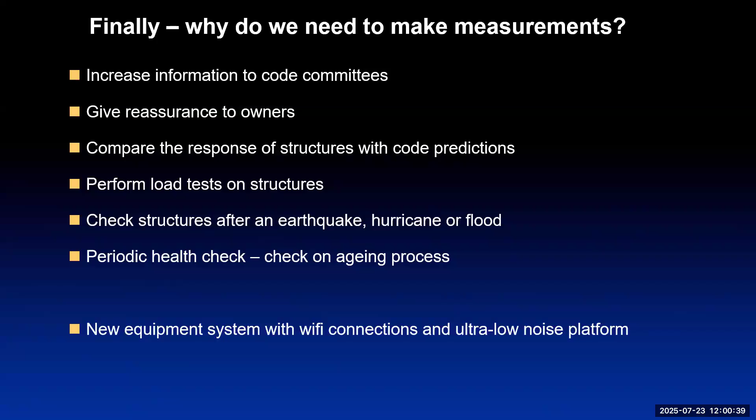You would think if they were all the same, all built at the same time, they would all be in a similar state, but they're not. So individual assessments are absolutely essential.